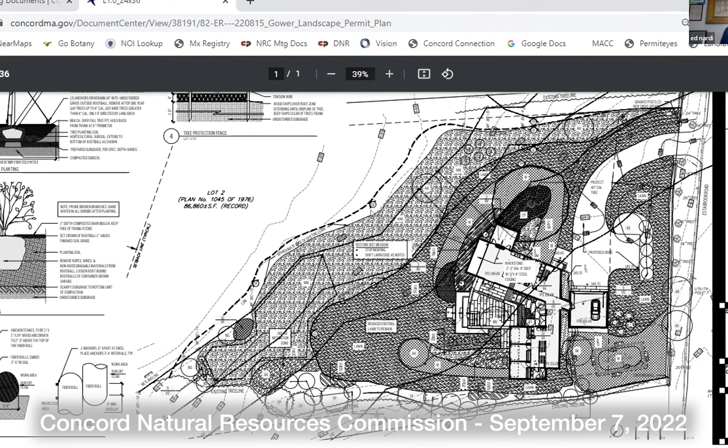And I think on the Feno markers, I think they're there on the plans, if I'm not mistaken, they're the square elements, but they're just not noted as- I think on the plan, that Feno markers with the annual mow only beyond this point should be noted on the top. So if you could add those to the plans.

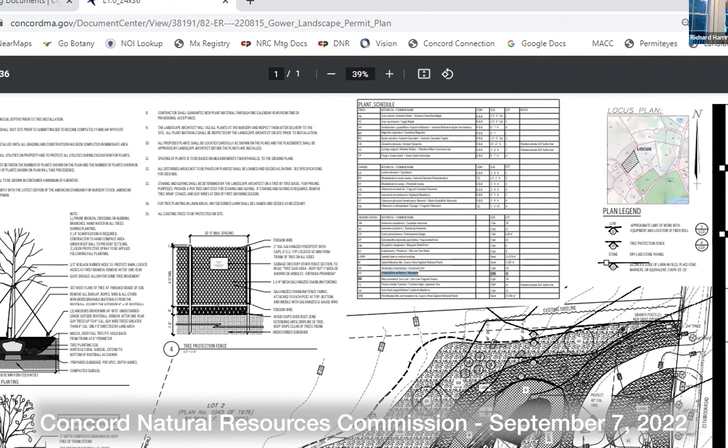Sure, there's a plan legend in the top there. Yeah, it's just to the right underneath the locus, there's a plan legend showing the squares and the Feno marker delineation there.

So if that's the area, everything behind that would be lawn. What Ed is asking, Rich, is to just note that those markers will be inscribed with annual mow only beyond this point, and to provide a detail of what those Feno markers look like, the standards - 2-inch aluminum inserts - that detail with that language. If you can put that on the plan, that would be helpful. Absolutely, we can do that.

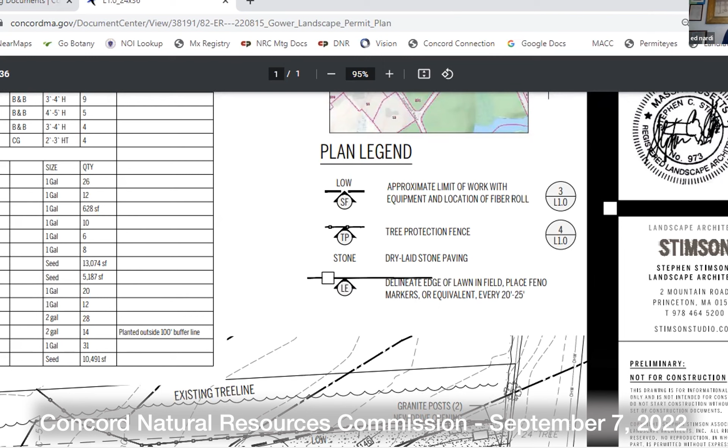And then I think just some additional comments. I think that the approach for the wet meadow reestablishment just lays out some very simple steps, right? Stop mowing, shift the lawn edge, slice seed, etc. And I think the goal here is, at least for the mitigation area, Rich, maybe not the whole area, but that should probably be overseen by a qualified botanist or someone with a degree in that, so that it's done accordingly and has the best chance for success versus just stopping the mowing and slice seeding.

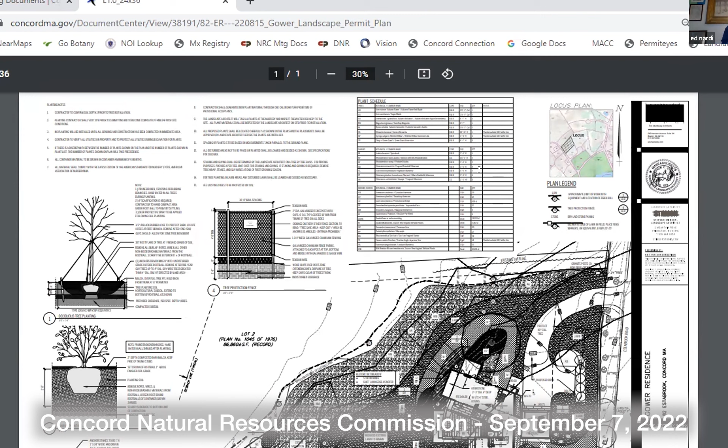Certainly. So this is a revised plan. We removed the note about slice seeding because we thought it might have been a concern for work in the buffer zone. Also on the line today are Jessica Alpert and Steve Stimson, they prepared this design plan.

They'll be involved with the field work also, I believe. So I'd like to turn it over to them to talk about their overseeing the project, etc., to answer that question. Okay, thanks, Rich.

This is Steve Stimson, and Jess Alpert is also on the line, who worked on the plan with me. We're registered landscape architects in Massachusetts, working on behalf of the owner, and our expectation is that this set of drawings would go out to a qualified contractor, and that we would be doing site inspections and observation during construction, in particular an annual monitoring for the first couple of years of that meadow condition.

We are fortunate in our staff. We've got a firm of very talented landscape architects and botanists, and a great field person who specializes in meadow restoration, Kevin Hartzell. He would probably be the person in our office that would do site inspection for that work in that zone. We're interested to see what happens in that meadow when we stop mowing it, and to see what comes in. So we recognize there may be some monitoring needed.

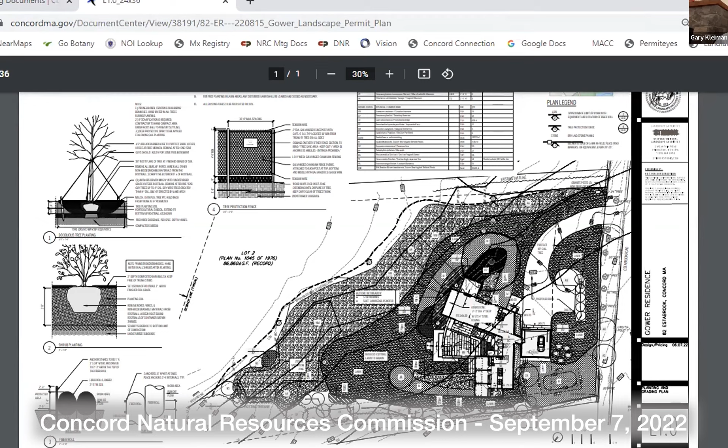Okay, and again Steve, just for the record, I don't think the commission was against the slice seeding approach. I think, as Dealey just said, we just haven't seen it before, and we discussed maybe this would be a good prototype to try and see how it goes. So we just didn't want to throw that out necessarily. I think the commission left that open to the applicant to decide. To clarify, the slice seeding could be an effective approach if overseen by somebody with expertise in that. That's what we were looking for, is to demonstrate there would be expertise in overseeing it, but either approach works.

We saw the slice seeding as a pretty low-tech, fairly light-touch, less invasive strategy. There's obviously a fair amount of competition from the existing turf out there. Another strategy would be to strip the turf layer off and do a straight native meadow mix on bare soil, which I think would guarantee a quicker result. If the commission feels comfortable with that idea, I'd love your feedback tonight, because that's another strategy we talked about that might get us a better result in a shorter period of time.

Yeah, I mean, that seems like a standard option of approach, Steve. I think that's again left to the applicant. If they want to, whatever way they want to choose, they can come back. Just testing the water and the temperature here for the commission. And if that sounds reasonable, we might be more receptive to that proactive approach.

Okay, great. I think the only caveat with that is if you do strip the turf, you make sure you have some organics. You either amend what the condition is, or look and see what the soil conditions are, but there will need to be a provision for that, and we would expect to see that. And if you're going to propose that, just as with the slice seeding, provide a narrative of the step-by-step approach. Okay, we'll be doing soil testing and ensure we've got the right percentage of organics. Great, okay.

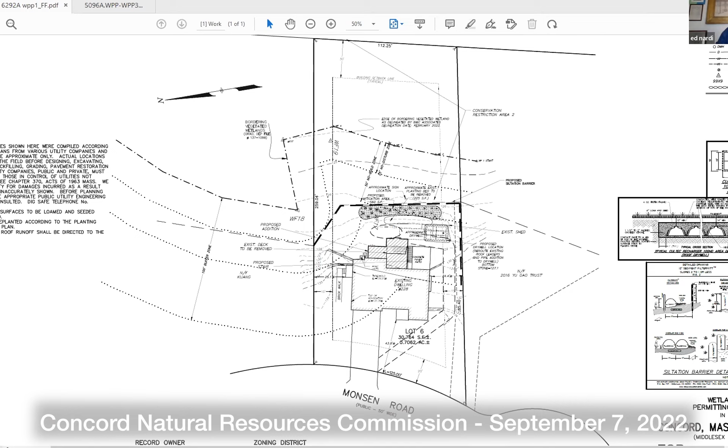We'll have that in Friday latest. Okay, very good. All right, any other comments from the commission? Okay. Any comments from the public regarding this application? I am not seeing any, nope.

Okay, so with that, I think we do have a special prepared for this. Nick, you want to take that on? Did you get that? I have it ready if that's helpful. Sure, go ahead. I don't have one. Sorry, okay, I do have it. I'm sorry, no, do I?

I can do it. Okay, I move that we close and issue an order of conditions for DEP file number 1371610, 281 Monsen Road, with finding A, standard conditions 1 through 20 and special conditions 21 through 53. Second, thank you Sarah. And we'll take the vote.

Nick, aye. Sarah, aye. Gary, aye. And I am an aye as well. Thank you, Aiden. Thank you. Good luck with the project.

Appreciate that. All right, our next application this evening is notice of intent, 147 Minot Road, DEP file 137-1613. Aiden, you up again? That is me again. All right, I can share my screen again here.

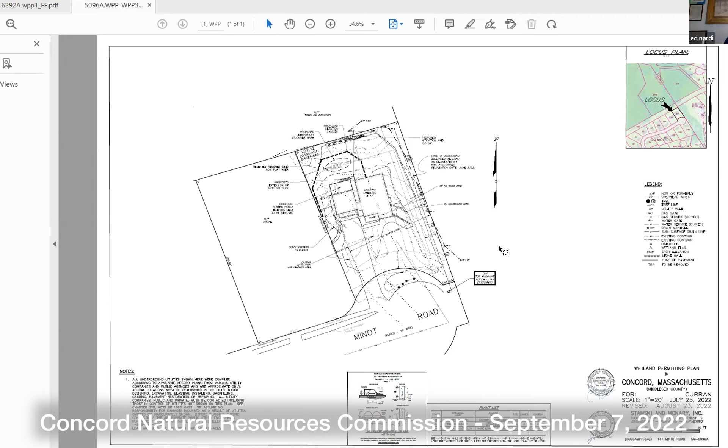All right, any comments from the public regarding this application? Not seeing any. All right, and so I think this evening we do have a special prepared for this one as well. Want me to do it, Gary? Sure, that'd be great.

So I move that we close and issue order of conditions for DEP file number 137-1613, 147 Minot Road, with findings A, the standard conditions 1 through 20 and special conditions 21 through 54, pending receipt of revised plans. Second, thank you Sarah, we'll take the vote.

Nick, aye. Sarah, aye. Gary, aye. And I am an aye as well. Thank you, Aiden. Alright, thank you guys very much. Good night, take care, good night.

All right, moving to the next application, making sure the time works. Let's see, we have notice of intent, 141 Comerford Road, DEP file 137-1611.

And John, I see you're here. Hey, good evening, commissioners. How are you?

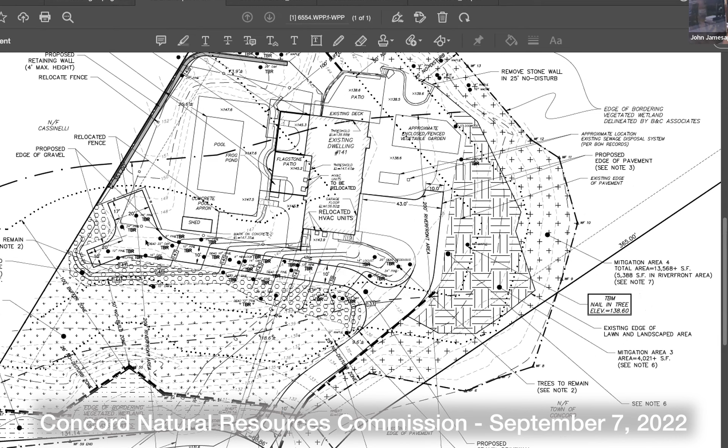At the last meeting, we were asked to propose an interim plan that kind of showed where things are right now. What we've shown here is the proposed new garage off the end of the house, the removal of the driveway from this portion, the grading that will occur, and these are the 11 new trees that are in the path of the new driveway.

We're moving to this final configuration here with the new driveway being moved to this end. It currently sits here, which is within 30 feet of the riverfront, and we're moving it to approximately 60 feet from the riverfront. We would have tried to tuck it a little closer to the end, but there's a utility pole here that kind of gets in the way.

We've moved the shed and the pad that went with the shed here over to this new location. We've cleaned up a stone wall that was back and encroaching on the 25-foot setback and just tucked it back in against the existing patio.

You were also asked to add some of those details with a paver detail and a wetlands detail up in this upper corner. So we've made those changes, and I think we got close.

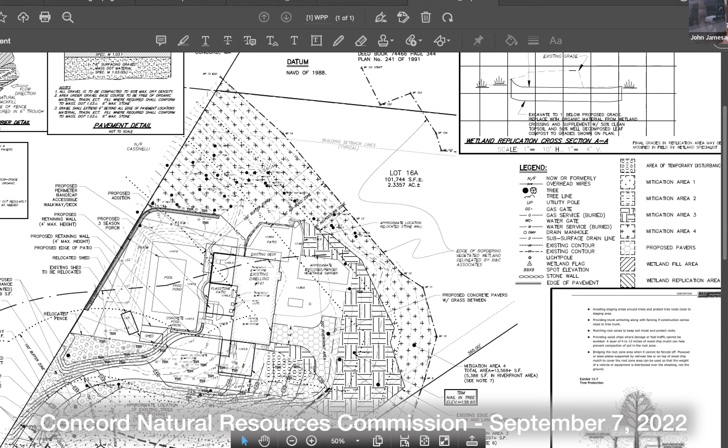Delia, I appreciate your email today, and with some of the errors that we had in our numerical processing, I turned that back over to Paul Kirshner at Stamski to read through and revise those numbers to make sure that we're on point.

One of the other slight detail changes is where our pavers are being put in this area to allow access to the septic field. It looks like the paver will still be a 25% border of grass.

Delia, you asked for the detail under those pavers. We're going to remove the organic matter and go with our existing subsoil that's essentially sand compacted under those pavers. The paver dimensions will change slightly to 15.75 inch squares with a 3.9 inch joint, which again represents...

I'm sorry to interrupt, but this all needs to be on the plan. We don't approve plans based on what is talked about at a meeting. So for that detail with the grass pavers, just show what that sub-base is. You're putting in 12 inches of compacted sand. That dimension is changing, that's fine, just revise that.

We've based this on your comments and some of those details, but we look forward to any other comments that the commissioners might have as well.

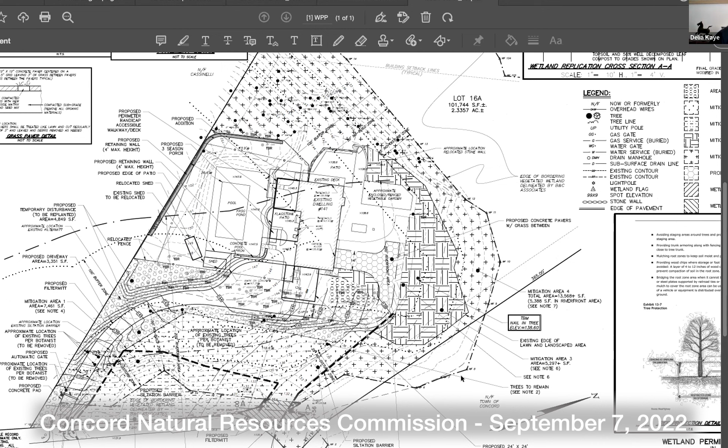Not a problem. You're removing the driveway too, right? Because that's not there - the driveway, the garage. Well, the driveway will show as to be removed. Is the existing driveway on the right? This plan is showing, I think, grading for a new driveway on the left, isn't it?

Yeah, but I think that's okay in the mitigation plan, because ultimately there's the driveway, and here are all the areas of mitigation. This plan will change because it's not really capturing the interim condition. But yes, this mitigation plan shows the constructed or proposed condition along with the mitigation, minus the grading and minus all the trees.

Okay, I think I've got all that. Any other comments or feedback? Just looking. I think there's...

I think Delia, you were looking for a cross section of the wetland replication area. Yeah, we mentioned that at the last meeting - you need to provide a cross section, and that needs to include topography.

Okay. We're relatively flat through here, so I'll go ahead and talk to Paul about bridging the existing wetlands to the left here with the wetlands that exist to the right, using that with the surrounding driveway. It's essentially flat, but we'll see what we can do to meet those requirements.

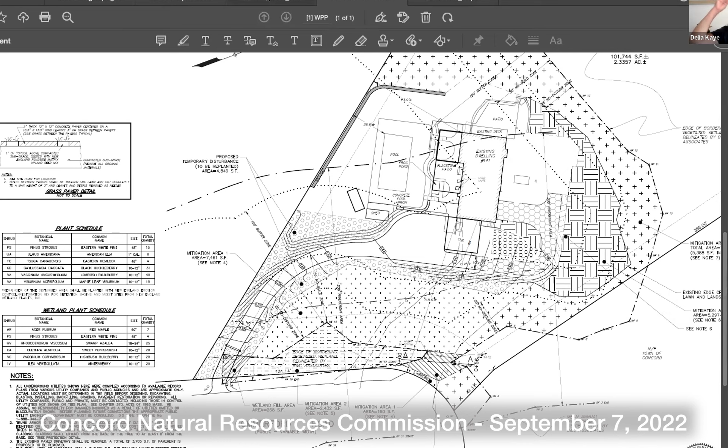And the planting schedule for the wetlands replication - is that prepared by your botanist? It's prepared, he has reviewed it, he has approved it. We can also put that detail on the plan as well.

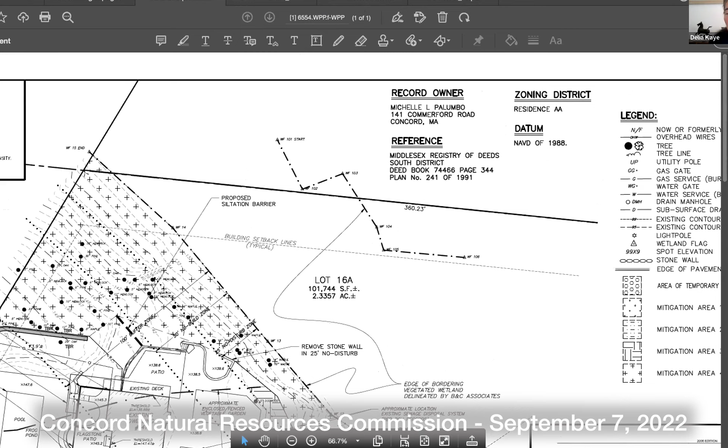Yeah, so it's pretty sparse. We usually see - I know it's a small area, but a lot of these fail, so we want to make sure it's done correctly. It would be best if you have your botanist prepare that for you. All right, I'll go over that with him and put that in the mitigation plan under his pen.

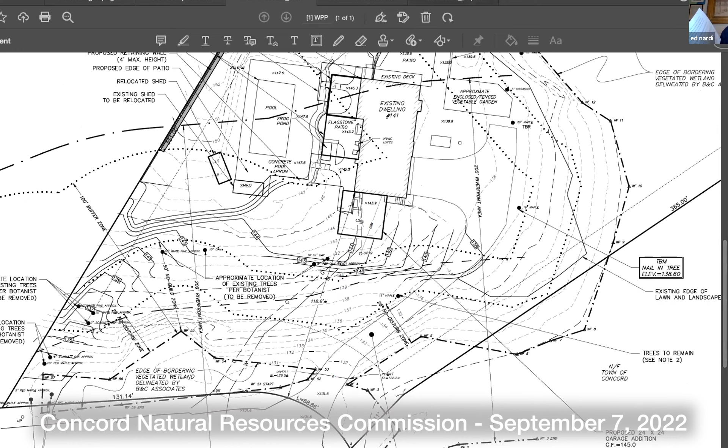Yeah, and that also notes that they're looking for some more specific kind of construction sequencing. I think that the initial one was provided on page 52, so...

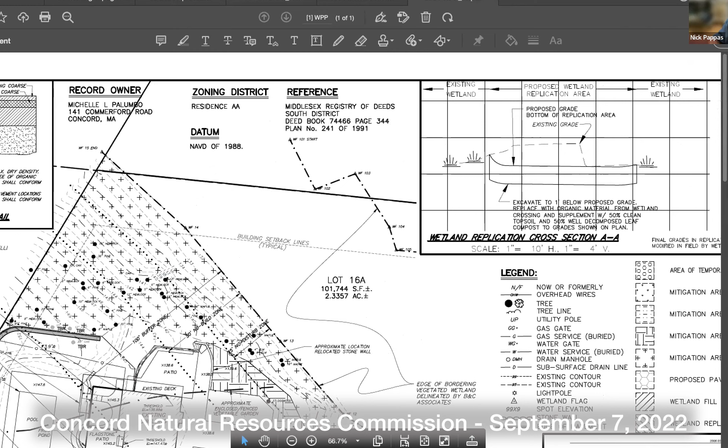Just to be clear, Delia, when you're asking for the cross-section of the restoration, are you thinking of something similar to the driveway cross-section that shows the layers of dirt, soil, or whatever is going to be there?

So you can see here the cross section that has been submitted to date. There's no depth, there's no elevation, so we don't know what any of these... but we do describe that this would be excavated to 1 foot below proposed grade. The grade would be to maintain a flow from the upper wetlands across the driveway to the lower wetlands.

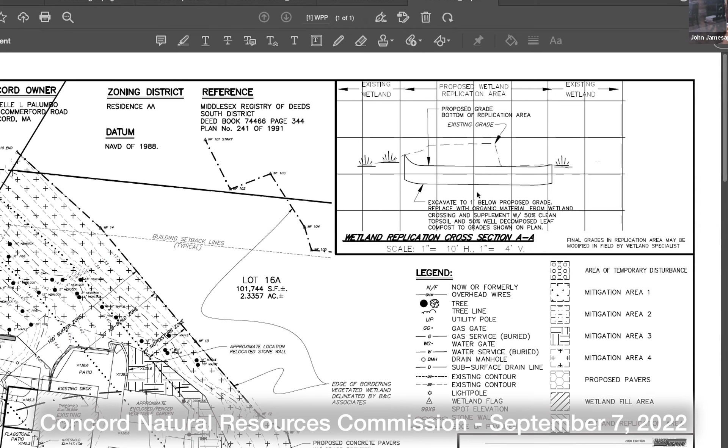So our goal would be to create a nice wide area, essentially taking that driveway layer off, taking the gravel out, and bringing that down so that it's a berm-free movement of water from the left to the right. We'll add more detail to that. Great, thank you.

All right, let's see. John, you noted that Stamski's going to take a look at all the calculations because there's a lot of numbers there that didn't jive. Yeah, I apologize for that. That's all right, we'll take care of that. Okay. Any other comments from the commission?

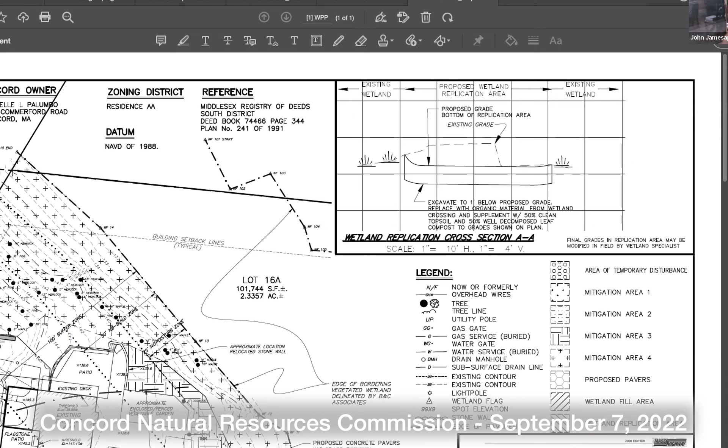So a couple of points. This was existing lawn, so our approach was to scarify and strip down the existing soil and reseed with a native wetland, native meadow mix. I think that's in the detailed plan. Did that not pass muster, or is it not there? It's not what's in your plan. It just says for mitigation areas 3 and 4 that you're going to mow it and then reseed it. Okay, it was supposed to reflect that, that's an omission. I'll take care of that.

Okay, and there needs to be, if you're going to do a native meadow restoration, there needs to be some detail to that. Are you scarifying? How are you doing that? Are you removing the turf? Are you going to slice seed? And how do these steps work? Understood, I heard the earlier presentation. We're going to scarify down and remove the existing turf. There's a lot of organic matter there, and we'll seed over that.

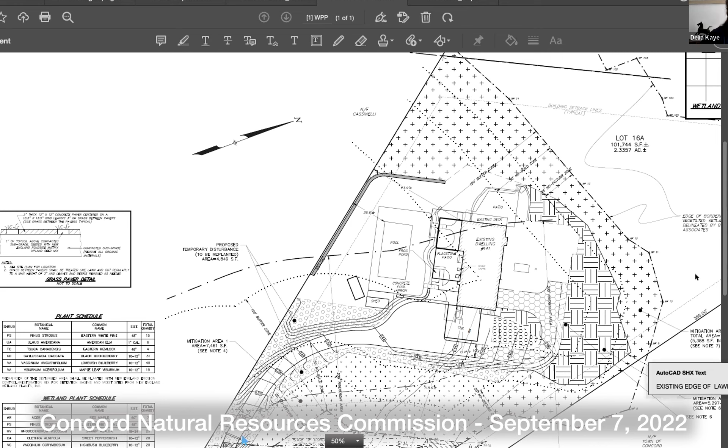It's just an added expense. They don't have to go between those two mitigation areas, just at the house side of things. And no, they're not expensive. They're just spikes with an aluminum cap engraved with, you know, mitigation area or annual mow only beyond this point. We can come up with appropriate language for your site.

Does the meadow need to be mowed at all? It will grow up into woodland if you don't. Would that not have been its natural state prior to anything? It's up to you. If you don't want to mow it at all, that's an option. Okay, it's an option. Yep, they don't have to. Okay.

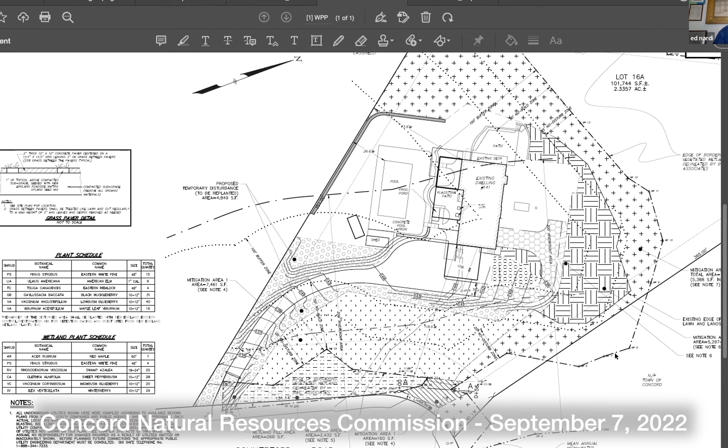Any other comments, commissioners? Appreciate the feedback. Let me just go out to the public. Any public commentary on this application? I don't see any. Delia, do you see any? I do not.

Okay, John, what do you think timing wise? Do you want to be put on for the 28th, or would you like to go to the October meeting? Based on these comments, I think the 28th would be pretty feasible. Paul has already started reviewing your comments, Delia, so adding these in would be pretty straightforward for that date. Okay, so you'll have to get all the work in by a week from this Friday, the 16th, I believe, right? It sounds right. Yep. Okay, John, we'll put you down for the 28th. Thank you for your time. Thank you.

Yeah, I'm fine with that. Gary, you good with that? Yeah, I'd like to see it. Yep. Nick, it's fine. Okay, so the commission's good with that.

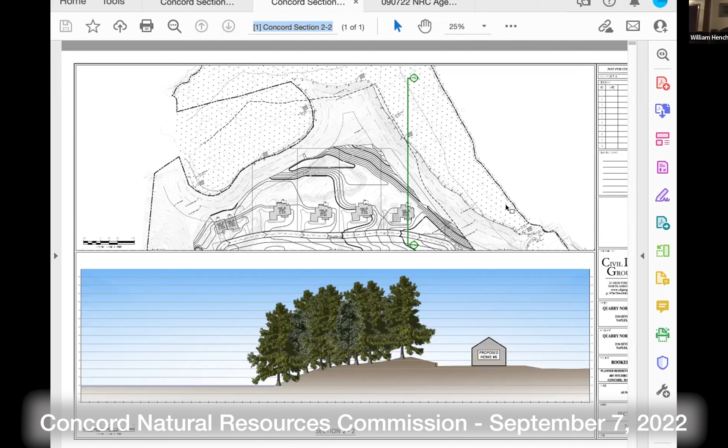We'll file them with the commission and you'll have them in your records. And that, Mr. Chairman, for tonight at least, is all I'm prepared to discuss.

I know the board wanted to schedule a site visit. I think that's perfectly appropriate. I served on a conservation commission, and I think I did site visits on every application I ever looked at. So I think that's perfectly appropriate, and I'm happy to accommodate that.

A suggestion on that picture, the plan - if you could show next time where the trees are and which way north is, I think that would be very helpful. Of course, I think we can do that. But I believe north is up on that view, if that's helpful.

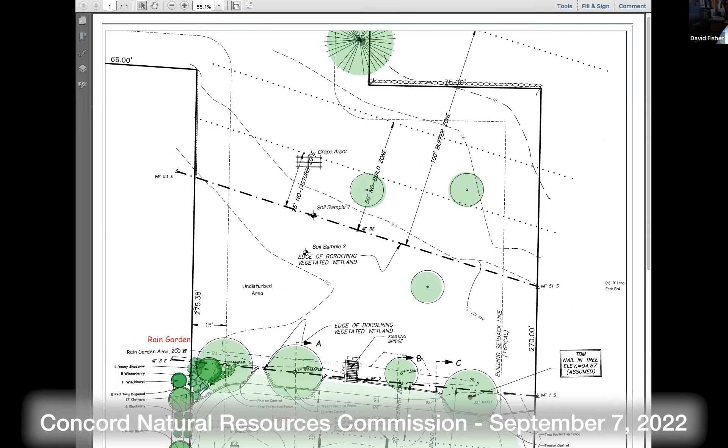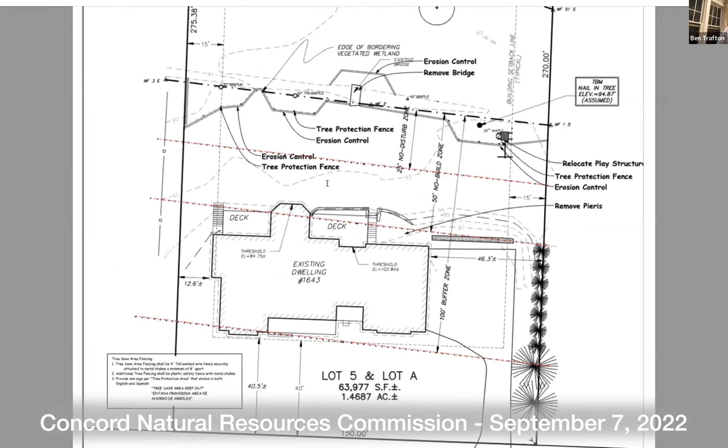Any luck, Dave? Um, or Ben, if you have it and want to pull it up and Dave could speak to it. Yeah, do you have what I sent you, Ben? I do, yep, I can share my screen. Thank you. Okay, can you go to the first one, Ben? Ben, if you can scroll up, this is the existing condition plan.

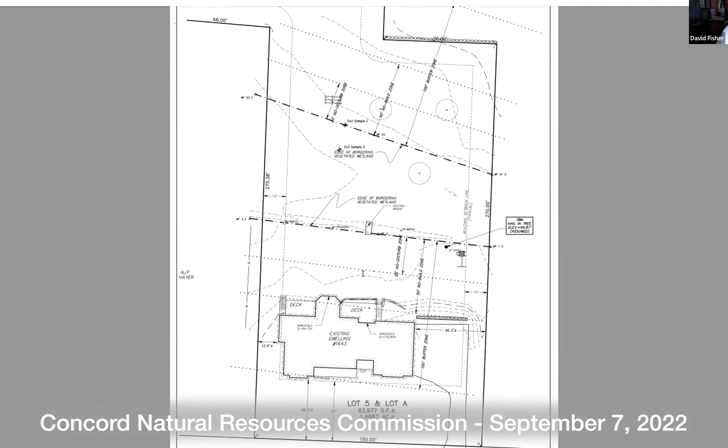And it shows the house at the bottom of the lot, Monument Street, down to the very bottom. The backyard is right behind the house. There's a ditch that cuts the site in half. And then the wetland is to the west, which is up on this plan.

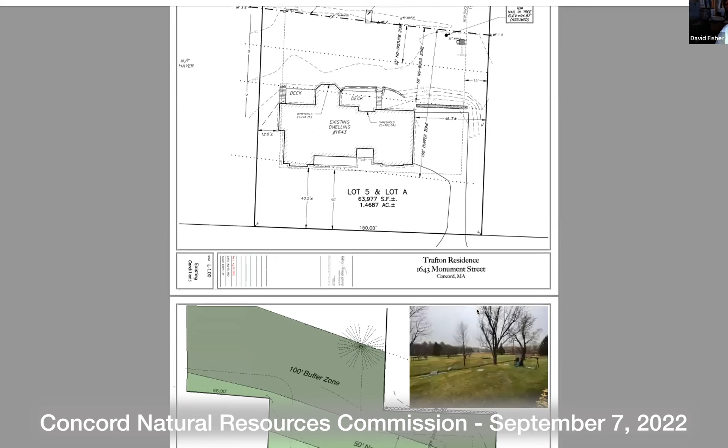And you can see that there is the 25-foot no disturb zone, the 50-foot no build zone, 100-foot buffer zone. If you can go to the second one, this shows, just so you can see, the house is at the bottom. There's a 50-foot no structure zone, 25-foot no disturb zone. As Ben said, the house itself, a little bit of it falls into the 50-foot no structure zone. Almost all of it falls into the 100-foot buffer zone.

And then as we go towards the west again, you can see the wetland line just at the end of the 25-foot no disturb zone. There's a ditch, there's an existing wooden crossing, and then there's a significant wet meadow area. And then again, there's the 25-foot no disturb zone, 50-foot, and then the 100.

The Trafton's property does a funny little dog leg. You can see there's a stone wall up at the back, and they do have access to a high and dry piece of land to the furthest west of their property. The photograph in the upper right-hand corner was taken from the deck of the house, and you can see the red arrows that show sort of the expanse of that photograph.

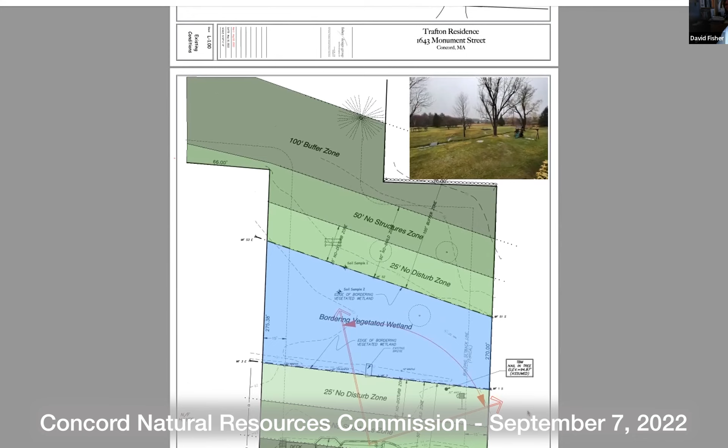Water flows from the north through the ditch to the south, goes down beyond the property, eventually crosses underneath Monument Street, and eventually drains into the Concord River. Where the play structure is, that is the most significant area of water flow. The neighbor's house, they have a driveway that comes off of Monument Street and drains with no controls through their side yard and then right into the drainage structure and saturates the Trafton's backyard.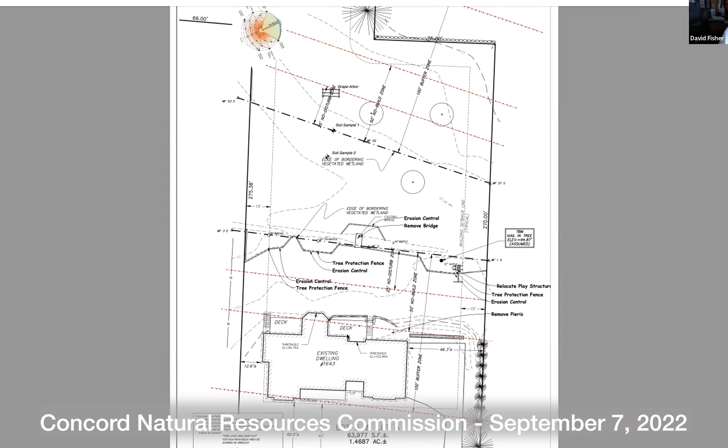So the work that we were proposing up in the western extremes, we're not proposing that anymore. So we're proposing erosion control, the straw wattles, tree protection fencing, the welded wire mesh with steel stakes to protect the maples and as you march across the property. I just threw on a red line to show the 25, 50, and 100-foot buffer zones for your information. And Ben, if you can go to the next one.

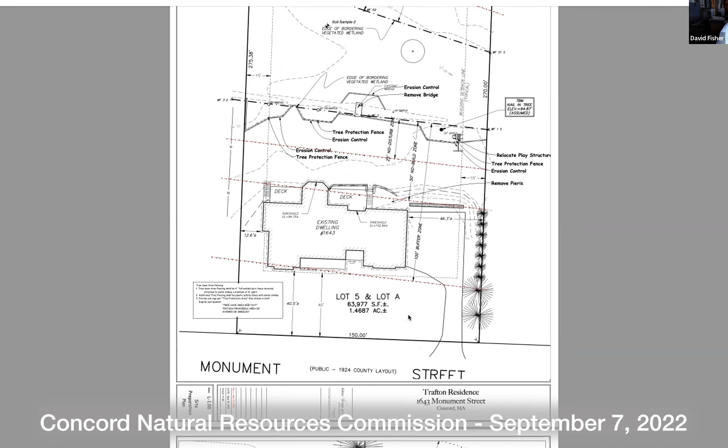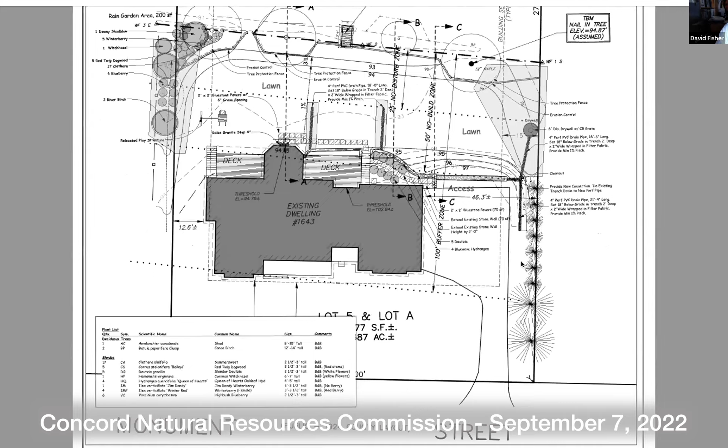This is the submitted plan. And then Ben, if you can go to the next one. Well, actually, let's go to the next one. It has a little bit of color that I hope makes it a little bit easier to read.

The light green circles are existing trees to remain along the ditch and then out in the back field. Three major hopes for this project. One is to provide access from the driveway. Right now, there is a trench drain at the bottom of the driveway and then a slope, a fairly steep slope that goes down to the lawn area. There are no stairs, there are no steps. And I believe it was Stephanie's mom that broke her arm slipping and sliding down that slope.

So what we'd like to do is at the house level, put in some pavers right at the corner of the garage and driveway that lead over to the left to an existing stairway and then connect to that. We would remove the pieris that's there and replace that with deutzia and blue wave hydrangea. And this existing stone wall that is at the base of the walkway, we would like to keep it exactly where it is, but raise it by 2 feet. So we're building on top of the existing wall.

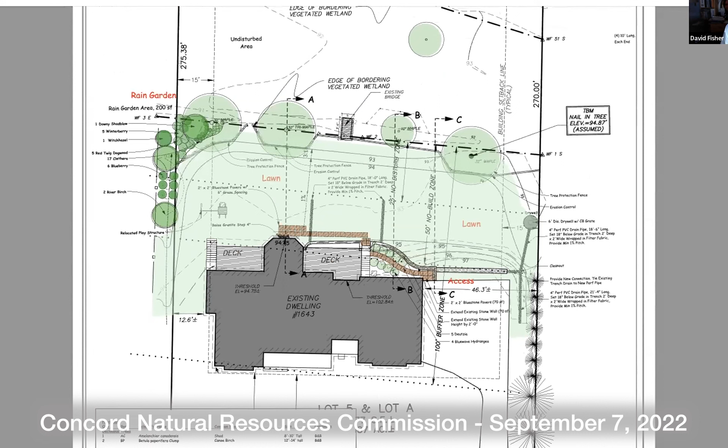That rain garden is approximately 200 square feet. And that, I think, is what we're trying to do. Yeah, and there are some details, and some sections on the last sheet.

So we've sort of contracted the project from what it originally was. The main goal is to get people from the driveway to the backyard safely, capture the drainage from the neighbor's yard to the north, and create a safer, more level, usable lawn area for their kids.

Okay, thank you, David. And Delia, you said you have not passed these comments on. Okay, so sorry, we haven't. No problem, so we can just jump in on this.

So David, if we go to the stone wall—I think you've got a stone wall, and you noted that you wanted to add something to that stone wall, but you're also extending that stone wall somewhat in that regrading plan, correct? Yes, the stone wall today comes from the stairs, then moves to the north and makes one curve. We want to add, just about where the 95 contour is, about 2 feet, and then bring that along at that level.

So, where it hits the driveway—it's level, yes. Understand that. So again, even though you're adding that small piece to the existing stone wall and bringing it back behind the 50, you have to add that to the computation of mitigation in the 50, which is a 10-to-1 mitigation. Okay, but it's outside of the 50.

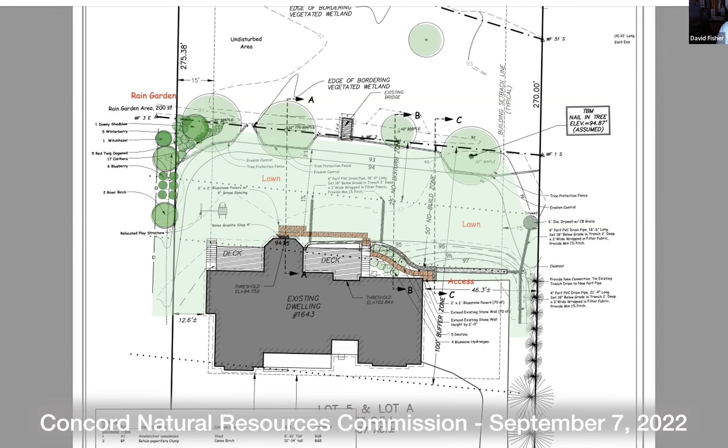The wall where it comes off the driveway and turns to the right makes a 90-degree turn, and where it connects is at the 50. So you're saying the existing stone wall goes to the 50? Yes, it actually goes a little bit farther than the 50. I was hoping to convince you that since the wall that exists today, the footing is there, the wall is there—we're not disturbing or adding anything, we're just bringing it up a little bit higher.

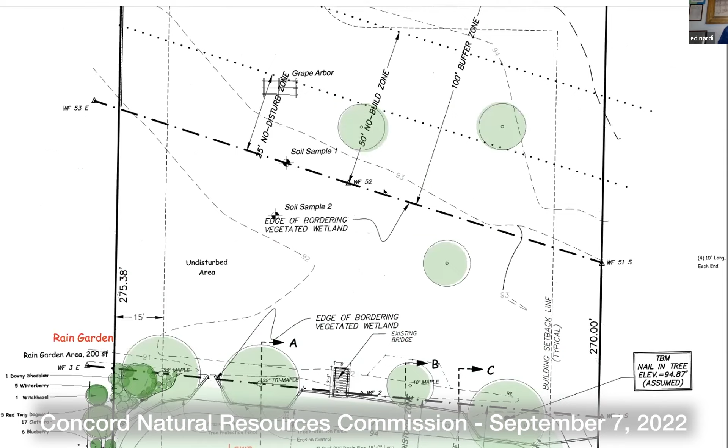Could you just scroll back quickly to an existing condition plan, just very quickly? You went by it—yep, this one right here. This shows that it doesn't quite reach that.

So again, just looking at this plan, it looks like that wall dies into that slope. So it does look, at least from this plan, that you're tagging a little bit of stone wall into the 50. It's not much, but it's got to be calculated if the commission is okay with that. You'll have to compute that square footage and again, mitigate that.

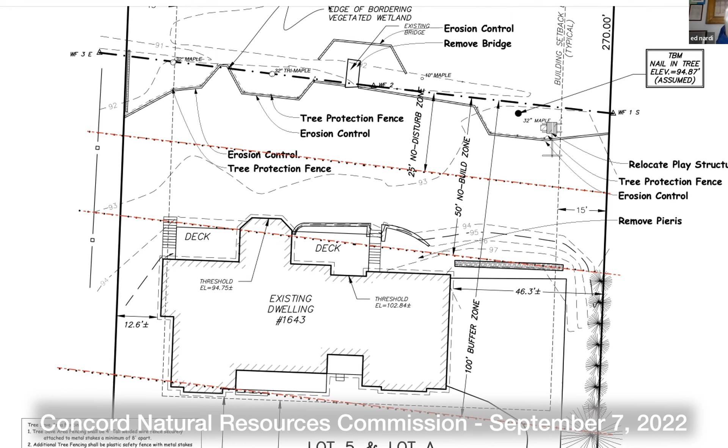And I think the same holds true for the dry well—that is in the 50. So would that be the actual dry well structure, or does that include the pipe? I would think so—I don't know, Delia, how do you want to call that? That's a tough one. I mean, usually the policy reads that it's above, on, or below. So it probably should include the piping as well, as well as the pavers that are in the 50. And then whatever's outside the 50 is just a 1-to-1.

So we had talked at some point about a good potential for mitigation being the removal of that euonymus—there's a massive euonymus in the back. So if you can just calculate what the 10-to-1 square footage is, capture those features—pavers, stone wall, piping—and then 1-to-1 for anything else that's outside, which isn't much. A little bit there. And then just get a sense of the area of what that euonymus size is, so those numbers can be reconciled and confirmed.

So we discussed the removal of the euonymus as possible mitigation after we had taken it out from proposed mitigation, because the Traftons were thinking if they cut down or took out the euonymus, it would open their views, since it's 10 or 12 feet tall, very dense material.

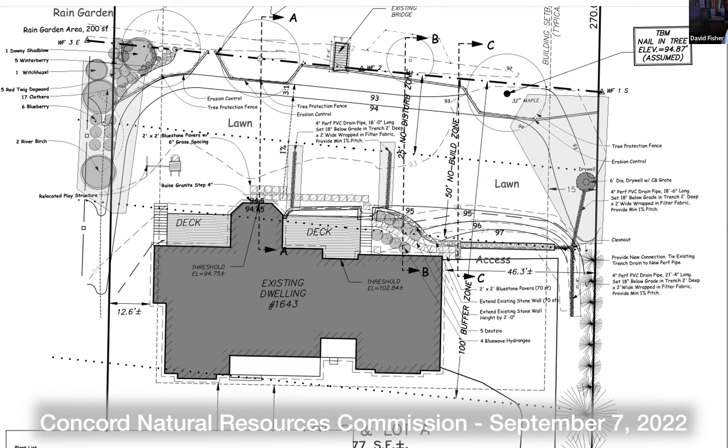I know the play structure is being moved out of the 25 to the 50, which is great. I didn't catch where in the 50—does that need to go on the plans? I know it's not a permanent structure. It is on the plans. Oh, I couldn't catch that. It's next to the rain garden. If you can just point that out on the deck, Sarah—to the left, right there. Oh, that's it. Okay, thank you very much. Great, and thanks for prompting that—the location is there though.

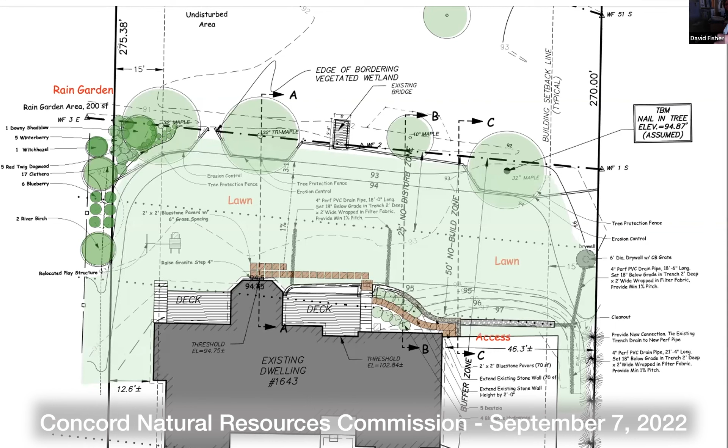The only other comment I had—it looked like some of the rain garden, unless I'm missing the property line, is planted off property. That seemed odd to me. Yes, when you look at the photographs, there was a fence along that property line. That fence is a number of feet over onto the neighbor's property, and I'll put words in Ben's mouth—he has spoken to the neighbors and they are okay with planting in that area. Do you think we should get a letter? I would think a letter from the neighbor allowing that would be appropriate, just so there's no kerfuffle in the future, protecting the homeowners. Yeah, we've talked to them and shared these plans with them, and they're encouraging this, obviously, because it creates boundaries between the houses anyway. So, thank you, Ben.

Okay, and then lastly, let me just go out for public comment. May I ask another quick question?

This is a little bit of a strange question, but I've been looking at Google Earth or maps, satellite, just trying to get a sense of where this is. It looks like there's almost white walls—do you know what I'm talking about? Or are they beds out there? Oh, the walls—so there is an existing wall, it's quite far back.

There's a stone wall where our property ends and the neighbor's begins - that's an apple orchard on the other side. There's also another perpendicular stone wall, and a raised structure that looks like a solar thing, though I'm not exactly sure what it is. But those walls are all on other people's properties.

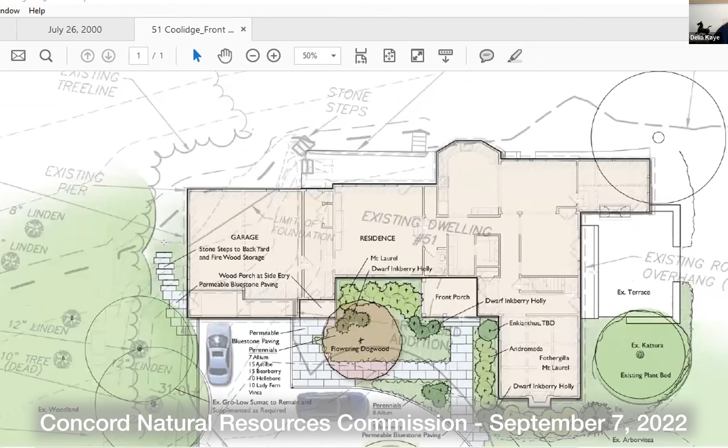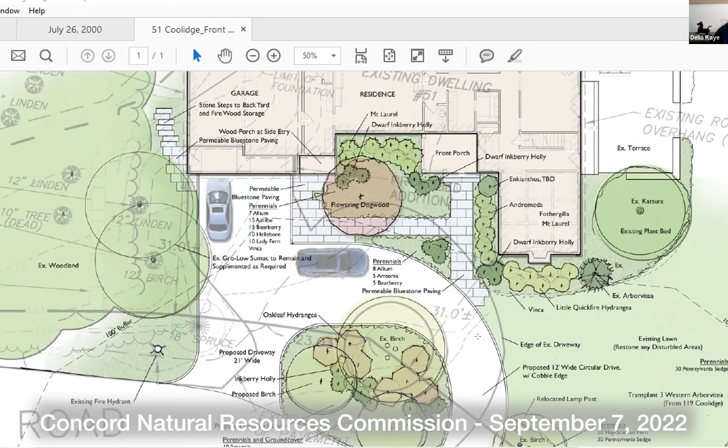Moving on to the minor modification for Delia. The homeowner has an existing approval to do additions onto their home at 51 Coolidge. The existing driveway is here, and they would like to change the outline of the driveway to something along these lines. It's a reduction in impervious surface site-wide, but there's a 29 square foot increase in the outer buffer zone. The applicant is fine with one additional shrub planting as mitigation. I don't see any issues with this - looks good, I like the cars on the plan.

I make a motion to approve the minor modification requested for 51 Coolidge Road, DEP file 1371571. Second. Thank you, Gary. And the vote: Nick, aye. Gary, aye. Sarah, aye. And I am an aye as well.

All right, COCs, we have two of them. The Laurel Street one will come off - they've got some dead vegetation and mounding, so we're going to work with the homeowner to get that straightened away before it comes back for sign off. The second one is Peraza McQueen at 63 White Avenue. The work was never completed - that's a property that's been in foreclosure for some time, but there's some movement happening with it. Staff has reviewed that and no work was done, so that's all set to issue.

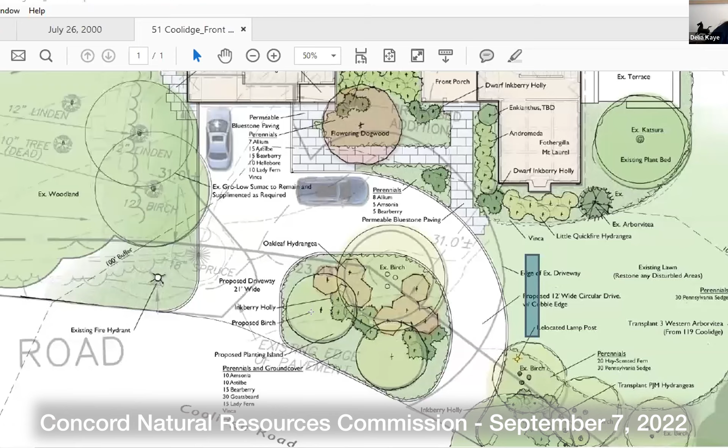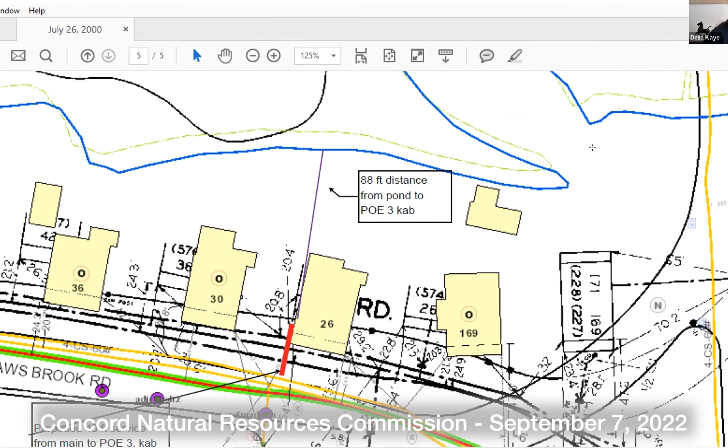I'm going to share that plan with you briefly. This is 26 Laws Brook Road. The homeowner is looking to have a short distance of gas service put in. It's not going into the existing driveway, so it's not exempt. It's 88 feet from the pond - standard natural gas installation trenching. They'll be done in a couple of days. I don't see any issues with this. Everybody good with those?